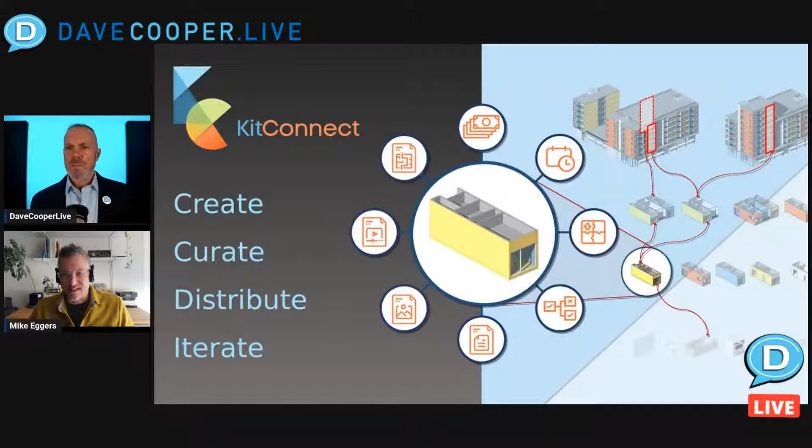Mike, before we get into all this, what problem is KitConnect trying to solve? Maybe we could pull up a slide and I'll summarize it. Let's go to the second slide. We got a little bit of mangled text here, but we'll get the idea across.

We look at the world in two camps, right? The world of building product creation and building design. And if you're working in a productized environment, a lot of people watching this show might say, we don't do product, we're not doing prefab, we're not doing modular. And we would challenge that. Think if you're doing healthcare, multifamily housing, if you're an owner operator building data centers or fast food joints, these are all productized, highly standardized ways of working.

And if you're working in this world of kit of parts, or getting into prefab and modular parts, assemblies and modules, there's a huge data divide between these two camps of how to develop a product and how to execute on a project. And it's no surprise that we're here.

BIM is, as we all know, a 20-plus-year-old technology, and it's gotten really good, right? But it was always set out to do the thing on the right, to develop construction documents. And it's really, really good, so I would say in terms of CDs, it doesn't fall short, it's a fantastic tool. But when I'm trying to work in the world of assembly logic and really marry that to the world of project execution, it massively falls short.

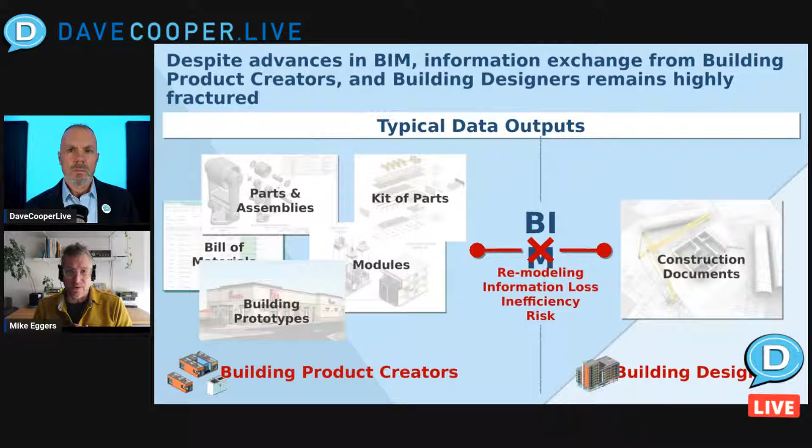We have a lot of loss in translation, a lot of remodeling and rework. So I start out with highly structured, highly standardized information. I hand it over to a group of designers to work with my kit of parts or my components or my standards, and a lot of entropy sets in, and that data exchange back and forth becomes very, very difficult. Very difficult to glean information back from that project execution, derive a bill of materials, derive product improvements. This is where BIM really falls short in this world, and introduces a lot of risk. It's harder and harder to reap the benefits of that way of working in a productized fashion. So we're trying to solve for that.

So, what qualifies as a productized building and productized design? Is this limited to prefab and modular construction only? No, definitely not. Think of a data center or a hospital, or a fast food building, right? These are buildings as products. Whether or not I'm executing them in prefab or modular, this is in some ways the IP of the company. Data centers are very much IP, and these are developed in productized ways.

So that way of working, how do I maintain standards? How do I understand the product life cycle of these components of the entire buildings, as they evolve over time, as you evolve your IP over time? You should be capturing that information, managing it in a scalable approach, having a ledger of change over time. So a lot of these ways of working that we're used to, maybe in the mechanical CAD world, are becoming more and more present in the world of AEC.

Got it. And you just let me know when you want that slide deck up there as we go through some of these questions and conversations. So, BIM falling short, right? How are design tools and BIM falling short for productized, modular, or design standards driven projects in general?

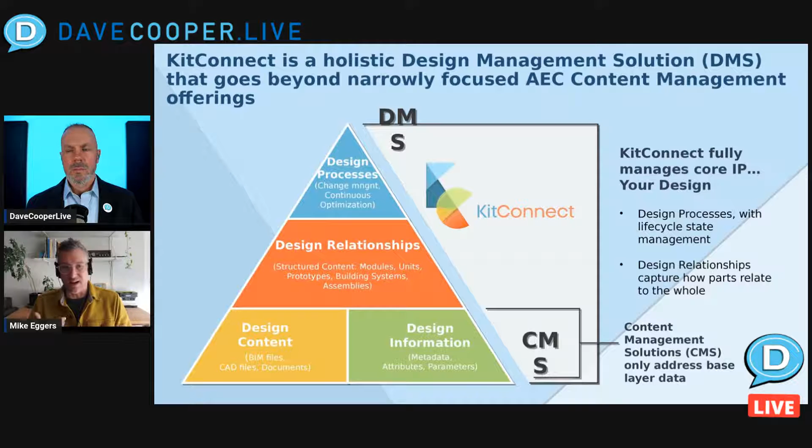Excellent. And this is what we feel creates this product-to-project workflow. So the goal with KitConnect is to create highly structured products that then become highly structured buildings. Importantly, as teams or different organizations sharing this information work together, we maintain that data fidelity from structured products to structured buildings, and that sets you up for better structured data insights.

Think of it: if I'm a prefab company, I have my kit of parts, and I want to share that with a third party to develop a building. I want to be able to take that building back from multiple third parties, derive a bill of materials, and look at what was site-adapted to evolve my kit of parts. Maybe there were discoveries on site of a defect or an improvement. How do I capture that and manage it back into the lifecycle of the product? So having apples-to-apples comparison and data fidelity as I share this information is really important.

If that breaks down, which is really typical in an unconstrained BIM environment, it's very hard to maintain that level of control. Once I throw that data over the wall, it's very difficult to retrieve it and derive a BOM, to make sense of it. So we're really trying to control for those factors and not lose all the important work and information you put into your kit of parts up front, so that you can distribute and share it efficiently with designers.

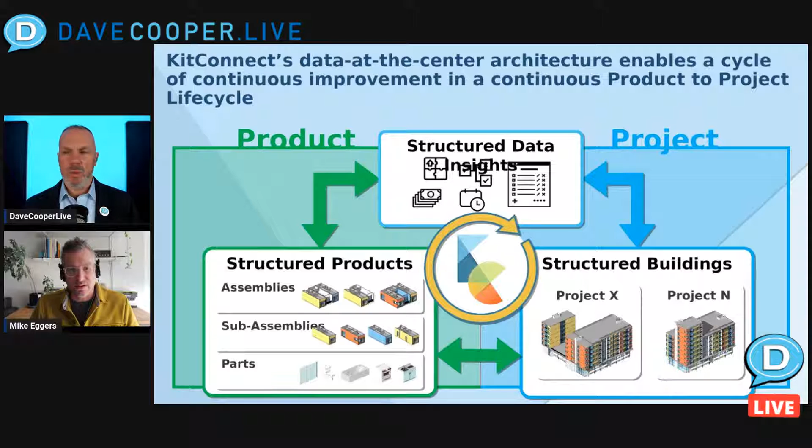Okay, great. So getting a little more specific into this product-to-project workflow, and how we look at this life cycle.

On the product side, we have a few different camps of users we think about: certainly industrialized construction pioneers, those prefab companies. But then we look at some other users too—owner operators, maybe building data centers or healthcare—and what we call repeatable designers. These are architects and engineers designing highly standardized buildings. They often work with the owner operators, executing on owner operator buildings, or sometimes working with prefab companies.

So there's a need to develop and manage their kit of parts in a scalable way, and be able to distribute—and importantly, not just distribute, but control how that information is used in the context of building design. This is something lacking in native BIM, and also lacking in content management systems: being able to say you don't have edit rights over this component, or you can only access certain layers in the stack of an assembly. We're able to control for that in the context of project execution.

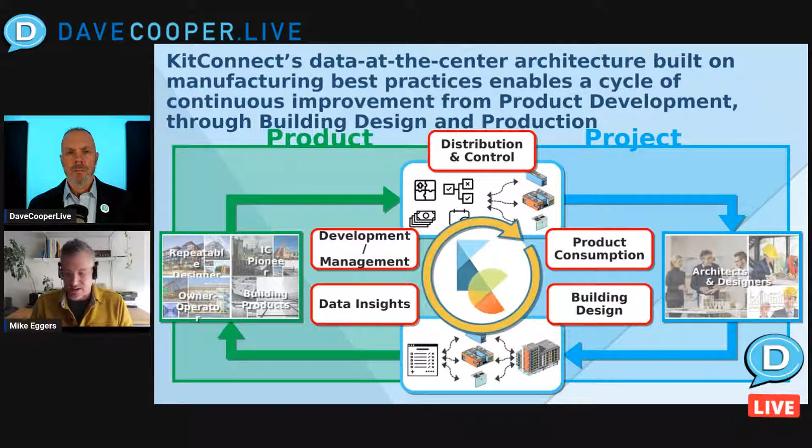So architects and designers are ideally in a product consumption mode when putting a building together using KitConnect. They're able to access that information efficiently, know they're working with the right curated set of data, using our paradigm of kits and projects, which I'll talk about in a bit. And as they execute on that building design, they can share that back with the product company so they can pull better data insights. This is that life cycle loop that we're trying to promote using KitConnect.

We achieve this through what I call that relational component database. This is heavily modeled after PDM and PLM solutions—product data management and product lifecycle management—coming out of more of the mechanical CAD manufacturing space. These are common tools in the MCAD world and in industrial design. Project Frog historically tried to use these, and maybe some folks watching today are struggling trying to force-fit it into their AEC workflow. There are great paradigms there, but they really fall short in the context of AEC, particularly when you try to use them in the BIM context.

So the general hierarchy of KitConnect is we have components at the base layer. Components are sort of the heart and soul of KitConnect.

This is the assemblies and sub-assemblies that you create. We can nest these infinitely throughout, as deeply as I want. I can reuse the same component in the context of other components. This is again a paradigm coming out of tools like SolidWorks and Inventor in the MCAD world.

Components then get organized and shared into what we call kits. You can think of these as libraries, so we call them kits. A single component can live in multiple kits. Everything we set up is on this many-to-many relationship, so a single component can live in multiple other components, and a single component can be shared into multiple kits.

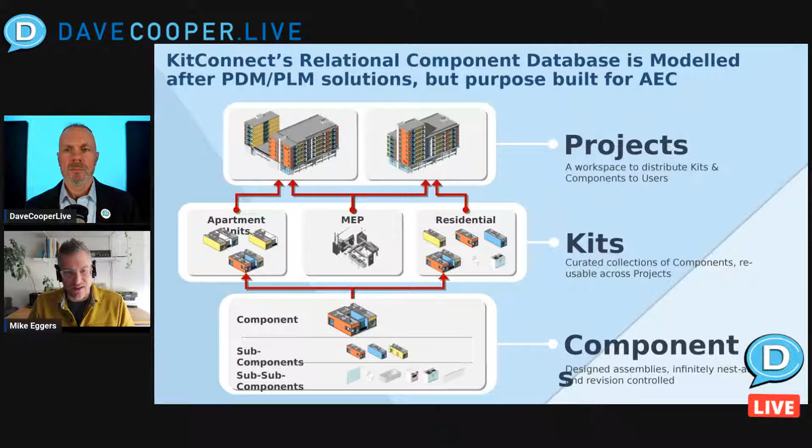Maybe what I'll do is we could jump into a demo if that's helpful. Before we get into the demo, I'll tee up that there are two core components to KitConnect: a Revit plugin and a web application. The demo will show both of these moving back and forth between each other.

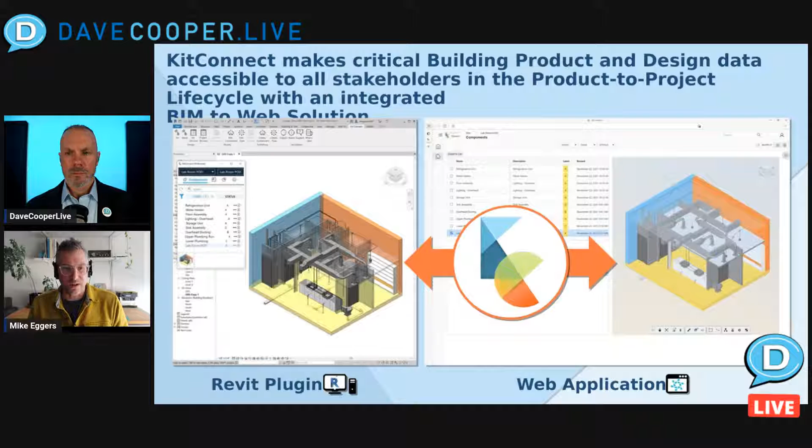The flow I'm going to demonstrate shows the idea of a product-to-project workflow, moving back and forth between these two. On the product side, first we'll just publish a component. Let's say you're a product designer working in Revit—we'll make a component we're going to call a subunit in this context, and that subunit will eventually be shared into a larger assembly.

So we'll ultimately make a module, a full apartment module out of this thing, made up of multiple child components. We'll publish this subunit, then move into our web application to show some lifecycle management, including revision state lifecycle management. From there, we'll assemble a parent component and move over to project execution, putting together components in the context of a building. The last piece we'll show is revision state management, how we manage the lifecycle state of a component as the design evolves over time.

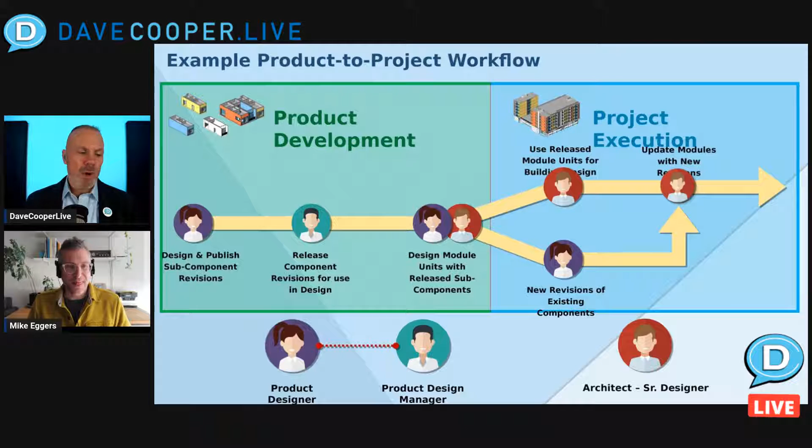Any kind of questions before I dive into the video demo here? No, I think that once we do the demo, it'll probably drive a lot of questions. So why don't we hop into it?

Okay, sounds great. Hopefully, I don't know, maybe my video didn't upload. I might need to switch over to just sharing my screen. You should be able to share a video as well, if you just hit that button it should give you the option to pick that separately. All right, okay, while you're doing that, give me a second.

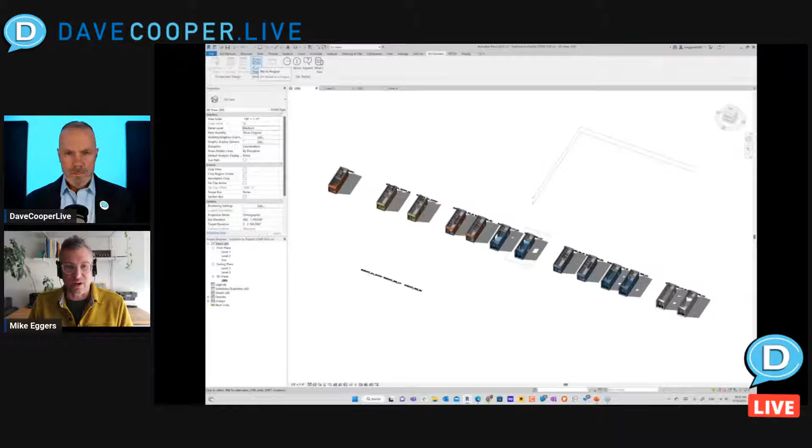Okay, perfect. So we're starting out here in Revit. We've got our KitConnect plugin installed. The first thing I need to do is associate my Revit file to a KitConnect project. So we're going to pin this file to a KitConnect project, and you'll see that it's going to bring up a list of available projects that I, as an individual user, have been invited onto. We have lots of levels of user permission here in the KitConnect system.

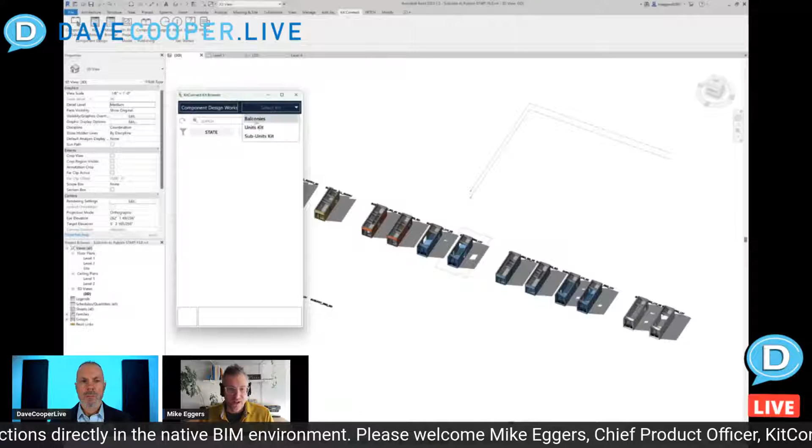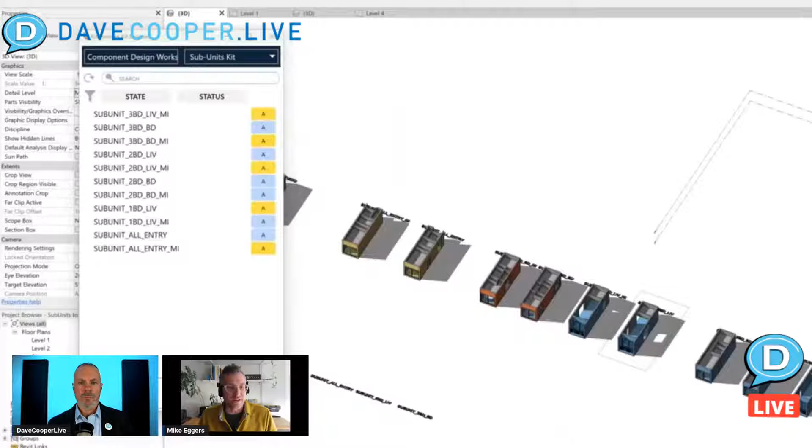From there, I'm going to open up what we call the kit browser. The kit browser lets you browse through kits. So you can see here in our web app, we've got several kits associated to this project. I have some balcony kits, our subunits kit, and units kit, so we're going to browse through those. The kit browser shows you the various components that have been curated and made available in the context of that kit. So I'm doing product design in this example, so I have access to my subunits and my units, the entire hierarchy.

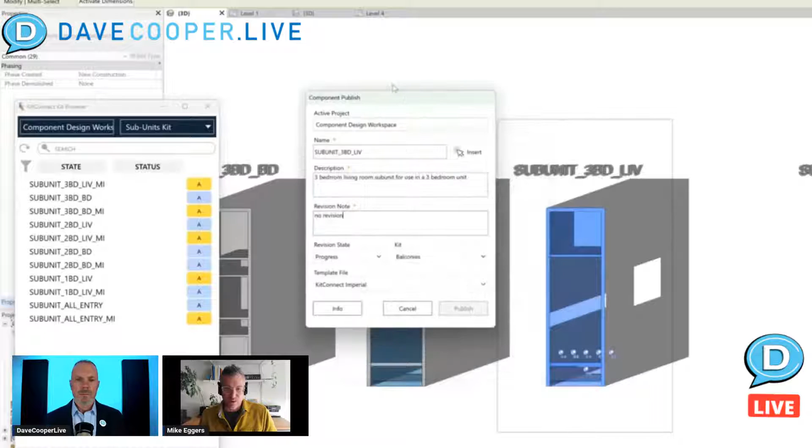And we're going to just focus on publishing one of these subunits as a component into my subunits kit. So I'm going to select that information, we fill out some information here. You'll see we have things like revision state, right, so that we're able to signal what status is this in. Is this in progress? Is this released to use? Is it retired? And we'll do some lifecycle state management in the next step in our web application. We specify what kit we want that to go into, and then an insertion point to tell it, when I insert it in our model, where does it go?

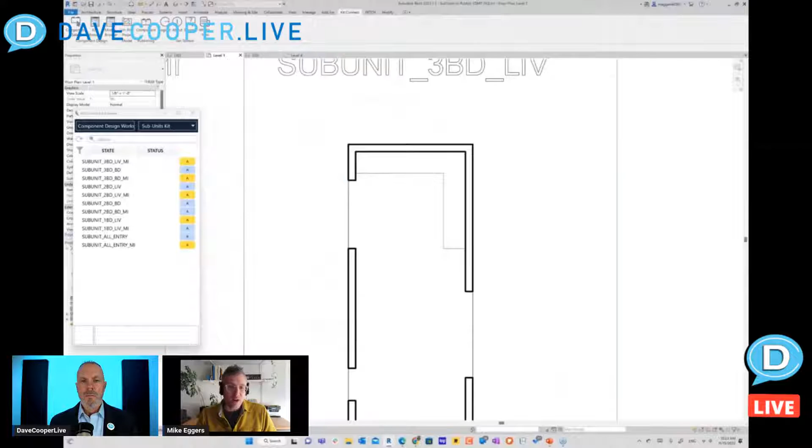So once we filled out all of that information, that's going to go up to the cloud, be made available in the context of that specific kit. And any project using that kit, it's going to immediately be made available to, along with all that information on its lifecycle state, so on and so forth. The user can go grab any notes that I added to that information. So let me ask you a quick question on the kits. Yeah, I'm designing something.

Can I search for certain parameters, like certain sizes, certain designs within the cloud, so it's easy for me to find these things? Those are features that are on this year's roadmap. We're looking to extend a lot more ability to search metadata on top of that. That's a big piece of the puzzle, so stay tuned on that subject.

Right now, it's mainly tagging. We do have that, and of course you can use naming conventions and tagging. So there's some amount of parameters that we can add there.

So now we're in our web application. I'm looking at one of our kits of parts, specifically that subunits kit. You can see I have a number of components already published here. The first thing I'm going to do is filter this list down to just show things that are in a review state. A revision gets various states from in progress, review, released, and retired. I'm looking at things that are just in review, and I want to release 3 of these.

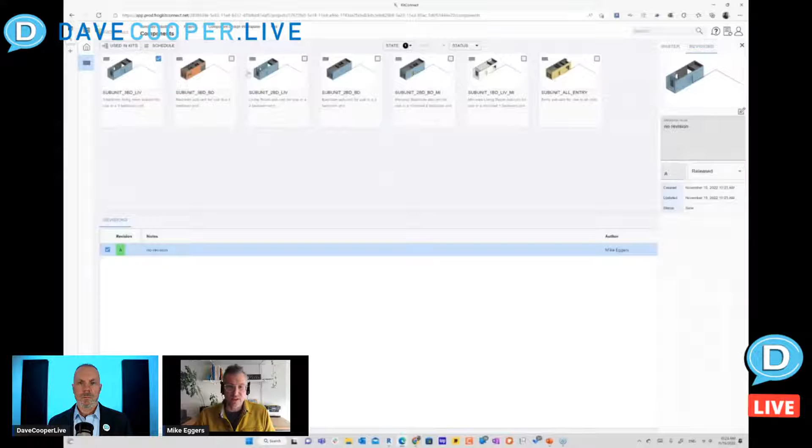So maybe I'm a design manager, and I want to signal to my designers, hey, these are good to go, go make other things with them, go make some apartment units out of it. So I'm going to flip 3 of these over from a review state to a release state that apply to this 3-bedroom apartment unit that I'm going to make.

So now that I've released 3 of those, I could filter that down. I can look at, okay, there's my 3 that I've put in a release state.

So the next thing we're going to do is hop over to Revit, and you'll see that release state immediately becomes available. The color coding here is indicating green indicates released. So now as a designer, I don't have to go ask anybody and hunt around, hey, is this okay to use? I can just see it in my kit browser in KitConnect.

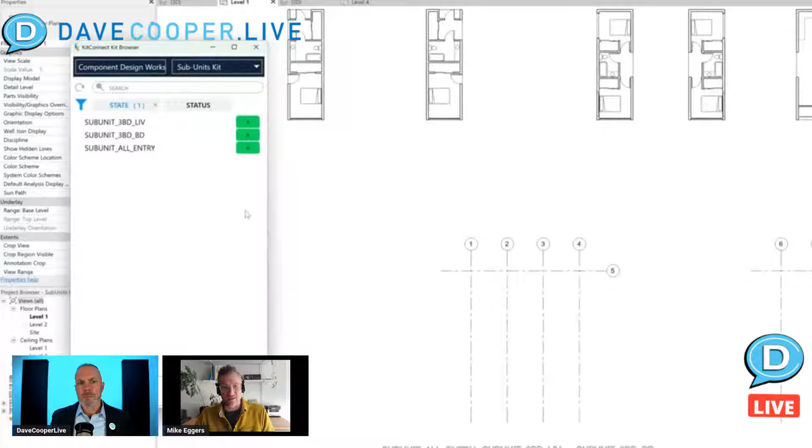I can do the same thing. I can filter that down and say, okay, just show me things that are in a release state. And from there, I can start building up my module. So I'm saving time, I don't have to go running around asking somebody. I have confidence what I'm working with is deemed allowable, so I can move quicker. I don't have to worry about introducing errors into this model. I can focus on my task at hand, which is creating this higher level unit.

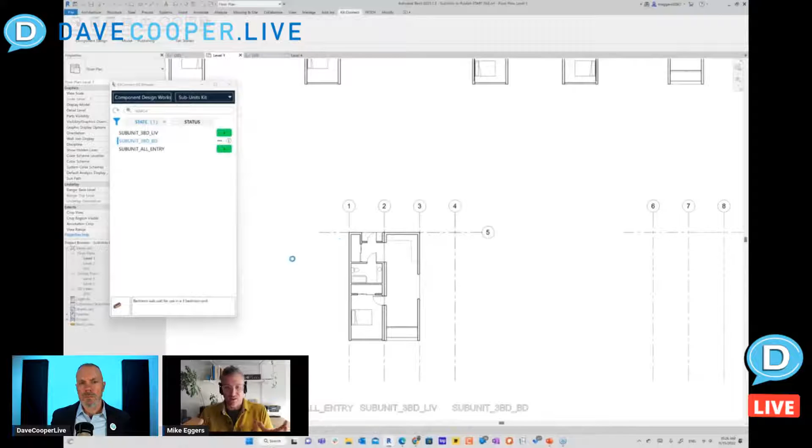So we're going to build up a whole apartment unit using 3 of those subunits, and then from there we'll publish that out as a unit. This will create that kind of parent-child relationship I was talking about in that relational component database. So we'll now have a parent made up of 3 children, all with revision state management down the chain.

Same exact process: fill out the information, give it a release state, specify what kit it's going to get published to. This time we'll publish it to our units kit. So really, it doesn't matter if you're creating hierarchies or nesting things. We kept the UI really consistent and really simple, easy to use and easy to understand.

Anything before we jump into the building side? I mean, there's a question I want to get to from Henry Mickelberg that came through. Let's put it up here on the screen and see what Henry wrote. Oh boy, he wrote a book. Two of them for starters.

He asks: so you are providing fully coordinated, fully performance specified BIM objects to Revit, allowing scheme architects to use them in concept design, is the first question. I'll leave this up so you don't have to remember. All of your time, cost, quality, percent improvements, are they based upon normal IC versus Frog IC, or Frog IC versus traditional construction methods? If so, I'd like to see the methodology working out.

So on number one, we're giving tools to provide the fully coordinated, performance specified BIM objects. This is the tool that's lacking: if I'm an IC company, a prefab company, how do I organize that information? How do I make sure I can curate it, distribute it, and get it into the hands of architects and designers? So you can see us as a platform to manage and organize that information.

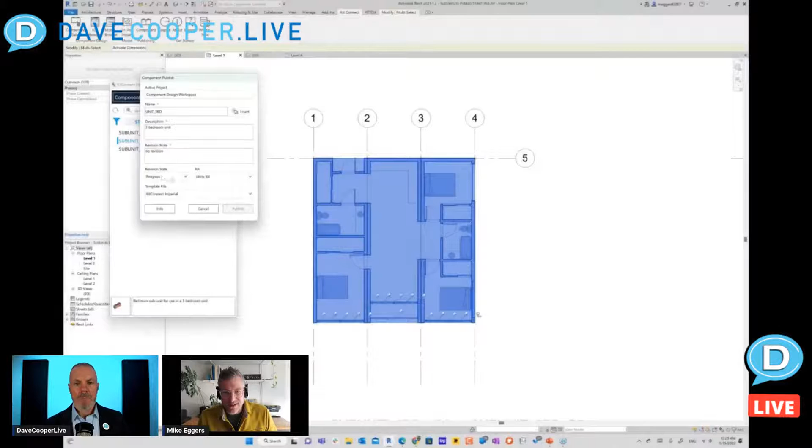That's great, that's great. Is there anything else you want to show us on that video before we jump further into this? Yeah, I think the last bit of it—do I just hit the play button again? There it is.

So just a few more minutes on this. The next piece is how do I get that kit of parts, and as an architect putting a building together, how do I efficiently do it? This is honestly the simplest part of the puzzle—it looks a bit boring almost, but there are a few things to explain.

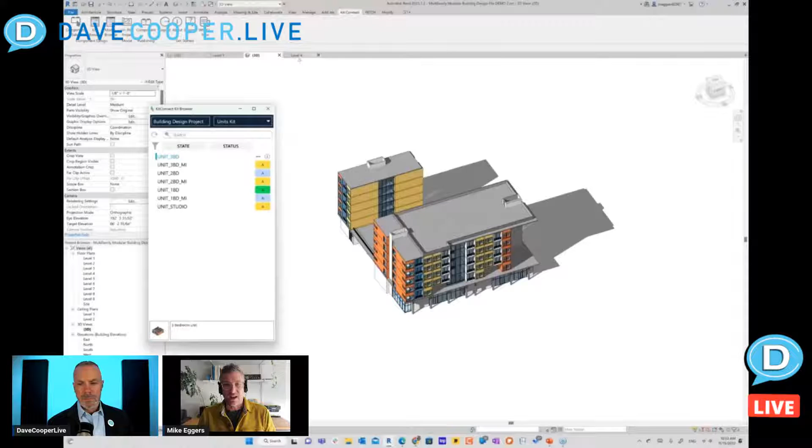We talked about that relationship of projects to kits to components. This project we're looking at—we've pinned this Revit file to a different project that has one kit associated with it, so we just have our units kit. This is really purposeful.

I'm handing this information over to an architect. When I was working in the context of product design, I had my subunits and my units, and I needed all of that information—all the sub-assemblies—because I was doing product design. If I hand this over to an architect, they have no business touching my subunits. So we're able to curate that information down and say, here's just the top-level parent component, don't even think about the subunits. You don't want them creating Frankensteins.

So this is an example of the curation piece and how to really control the interaction with that information. We could go a step further and even lock down those users from being able to edit those components or create new revisions of them.

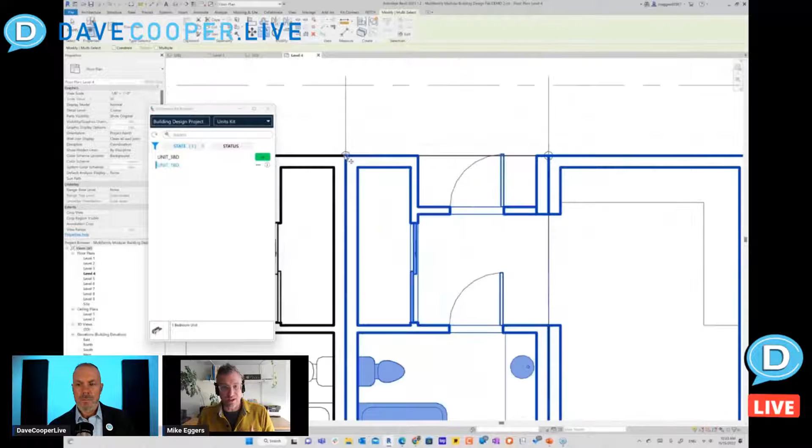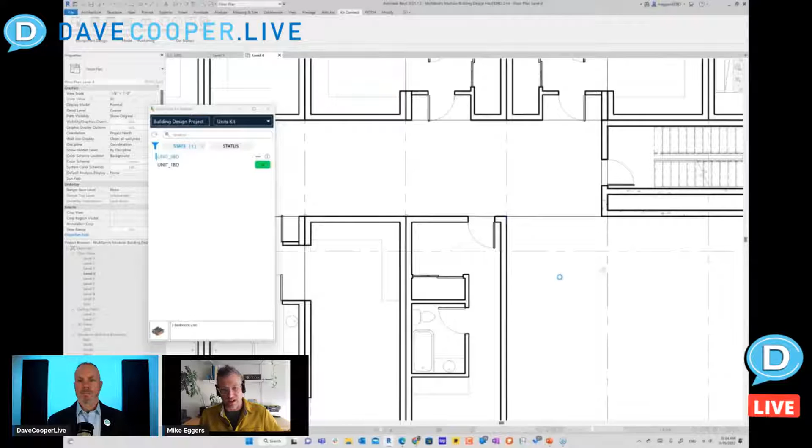So the cognitive overhead for this user on the project execution side should be: learn KitConnect in 15 to 20 minutes, get up and running, and it just gets out of your way. I have the confidence as the product owner that none of my data is getting mangled along the ride. Then I'm able to pull out a bill of materials and things like this. This is really just the simple piece of the puzzle—make it really easy to get that information in the context of the building, like copy-pasting between levels here.

Yeah, I was going to say, and the person working with this, regardless of whose module they're using, whether it's locked or not, they can go all the way into the finest details to see what's there, right?

Exactly. And then the last piece I'll show is if they're creating a new revision, or making a design change to one of those components, how we can signal that information back to any designer on any KitConnect project using that component. So design change and cascading that change, broadcasting it immediately in real time is a big piece of the puzzle.

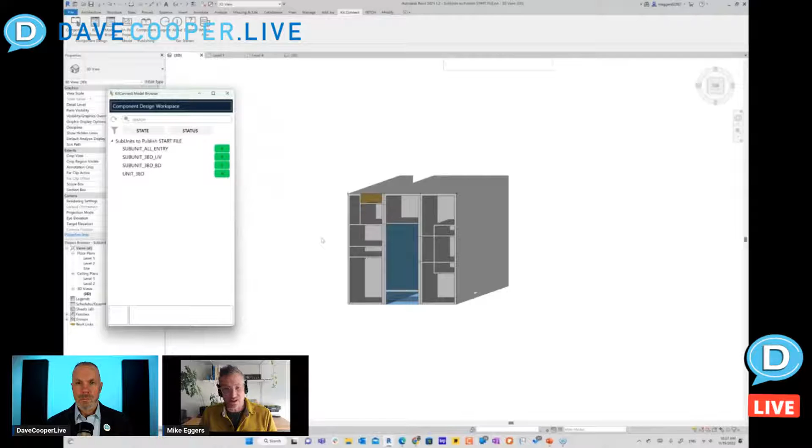The last thing I'm going to show here is we're going to focus again on that module. I'm going to open it up for editing. We'll go back into our Kit browser and open it. It's going to download that file from the cloud, open it up automatically in Revit, and then I can start working with it. I can add more components to it.

So you can see here we're now working on that unit. I can see it's displaying I'm in my 3-bedroom unit. It lists out I have 3 children, so those are all components - the child components that live nested inside it. I can see the revision states, and then I can go and add more information.

I'll open up my Kit browser, go to my balconies kit, and then I will just add that balcony. Again, this is another component - I could freely model that if I wanted, or I could use a component from our library. And I'm a product designer in this context, so I have full edit rights over this component.

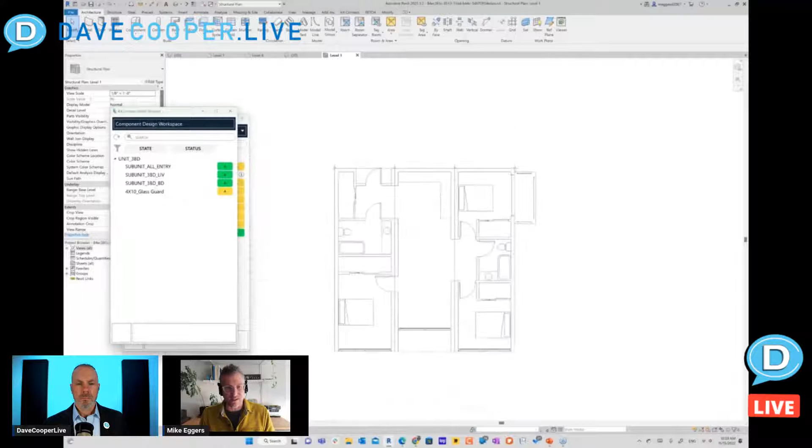Once I add the information I want and make the modifications I want, I can publish this either as a new revision or a new version, and I'm going to choose to publish this as a new revision. This is going to bump that to revision B. Once I do that, anybody on any project interacting with this unit is going to get a signal in the system that says there's a new revision available.

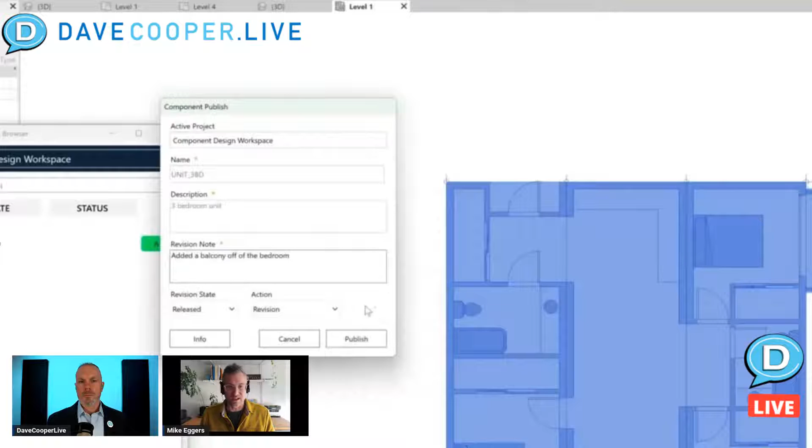So I'll put a revision note, say that I added that balcony off of the bedroom. I'll specify I want to make a new revision. I'll publish that change, and now in the context of my model, you'll see we get that little R that appears over that component telling me there's a new revision available.

I can go and act on that - get more detailed information on it, see the different revisions available. I'll see this ledger that says there's a revision B available. I'll say I want to swap to that revision, and it's going to pull in that new revision with that balcony. I have access to all of the notes, and so on and so forth.

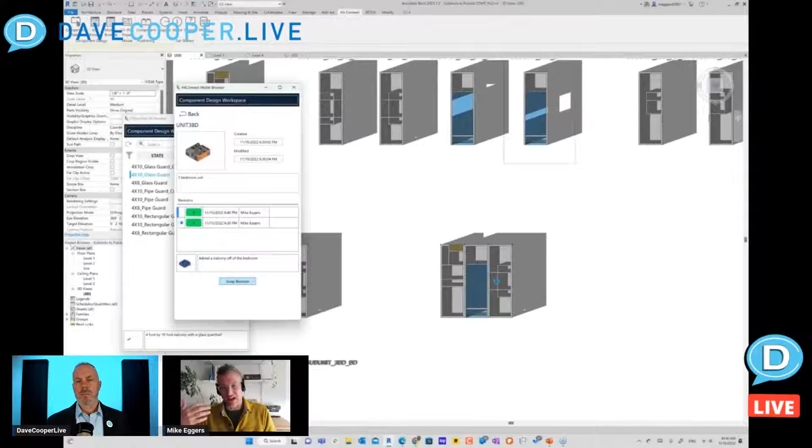And that's anybody on any project that's connected using that specific component - they're going to get that change. And they have the option not to take it too, and I think that's the other important part. I might be about to submit a permit set, and the last thing I want is somebody automatically reaching into my model, making changes.

So the end user has the choice, they have the information in front of them. Maybe the note says design defect, do not issue for permit. Everybody using that component is going to get that information, and then they can push that change through the model. So that just shows you completing that life cycle loop, how to communicate that information back to the end users as you iterate change. That's really the iterate piece in Kit.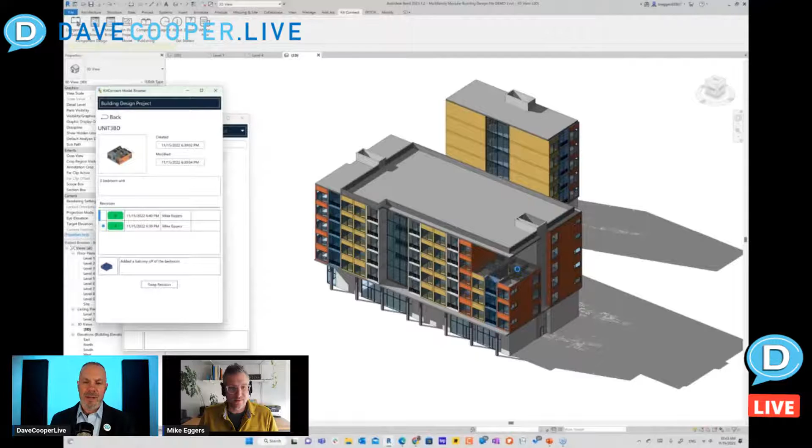And what about codes and knowing all the different fastener codes, whether you're in high wind or low wind, right? Depending on the zones you're in, how does it account for all of that?

That's still back to the humans, right? But we're going to give you better ways to organize that - think of curating that in the context of various kits. So I might have a kit that's specifically for hurricane load on the East Coast, versus earthquake on the West Coast. So I could create a West Coast kit and an East Coast kit.

So just having the ability to organize the information is going to be part of that logic, and the revision system too. Codes change all the time - I might make a design change to a component because the code changed this year, and I want everybody to know that, and I can cascade that information.

So we're giving better tools to manage it at scale. At the end of the day, how you actually make those design changes comes down to the humans looking at that. We're not quite there yet.

Talk to me a little bit about training on this, like prefab design training. What if somebody cuts and pastes in the wrong direction, and the mechanicals and chases and MEPs are way out of whack? Or does it actually, when you're using this kit of parts, automatically snap things where they need to be?

So when you insert it, you have confidence that thing is correctly formed. Now we can only reach so deep into Revit and control what people do once they have the information. But we do have tools in the system where I can refresh all of that information. So if somebody mucked with the model, I can refresh the entire model, and it's going to replace it with the correct definition from the cloud. So we have automated QA/QC steps we can put in there to ensure that if anybody introduces errors, we can knock them out of the system.